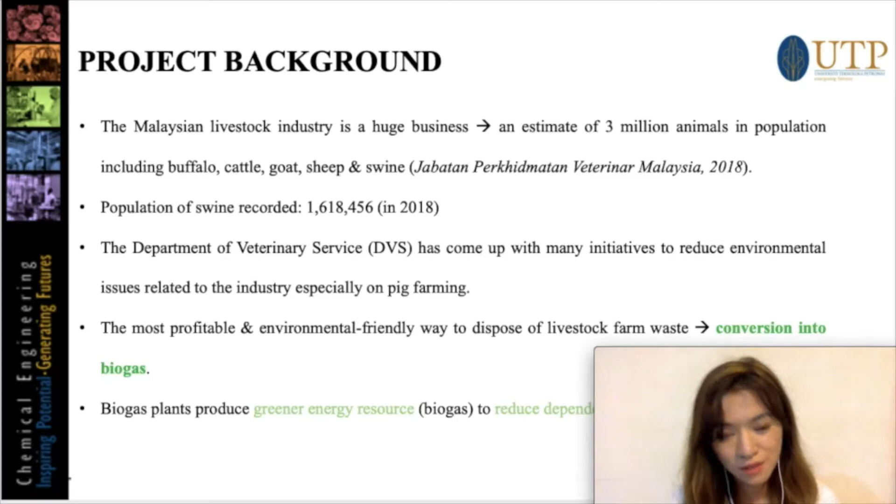Moving on to the problem statement, there are too many pigs farmed in Malaysia, and most swine farm waste is poorly managed, which can cause air and water pollution.

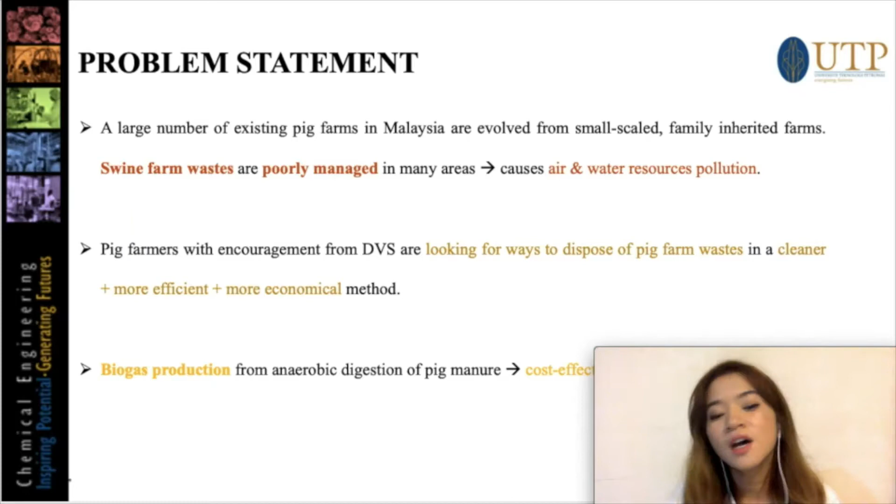DVS is finding ways to dispose of pig farm waste in a cleaner, efficient and economical method, in order to produce biogas from anaerobic digestion of pig manure to overcome these issues.

For the objective of the project, the main aim is to design a fully operational biogas production plant that converts pig manure into biogas and biofertilizer.

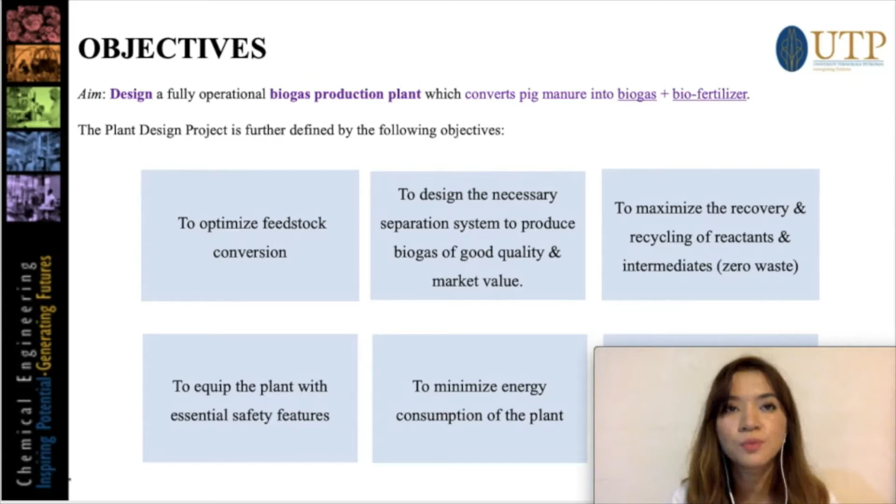There are 6 objectives that need to be achieved: to optimize feedstock conversion, to design the separation system, to achieve zero waste management, to equip essential safety features in the biogas plant, to minimize energy consumption, and to provide the most efficient plant with a high return on investment.

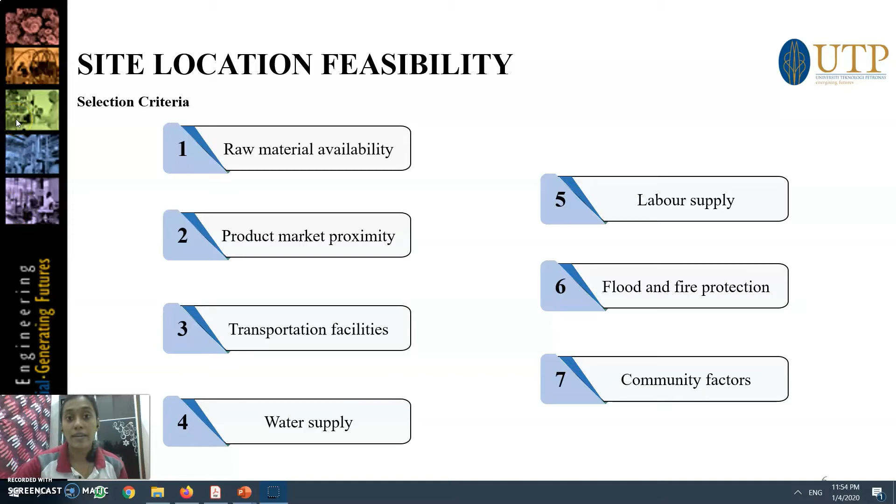We selected 3 locations throughout Peninsular Malaysia: Tanjung Sepat Selangor, Segari Lumut Perak, and Seberang Perai Selatan Penang. Out of these 3, we found that Tanjung Sepat Selangor was the most suitable, with the highest score in the scoring matrix.

This is because Tanjung Sepat holds the largest pig farming area in Malaysia, with approximately 250,000 pigs, and it is located in the center of Peninsular Malaysia in Selangor with better infrastructure for transportation, water supply, and flood protection.

The market is also close, with Klang Port being just 1 hour away, and the site is located over the Gas Malaysia supply grid. Hence, Tanjung Sepat Selangor was selected as the site location for our plant.

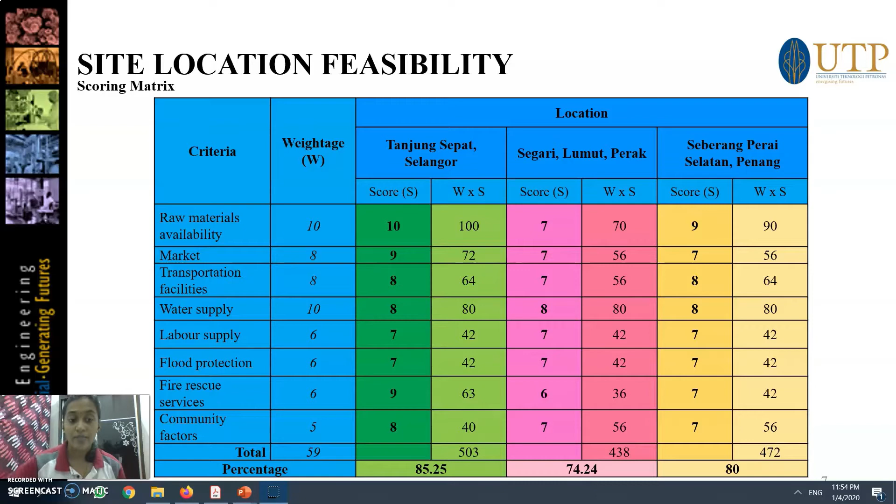As you can see, Selangor is very convenient with other facilities around it, located over the supply grid and surrounded by independent power stations which will make use of the biogas. Hence, Tanjung Sepat Selangor was selected as the best location for our plant site.

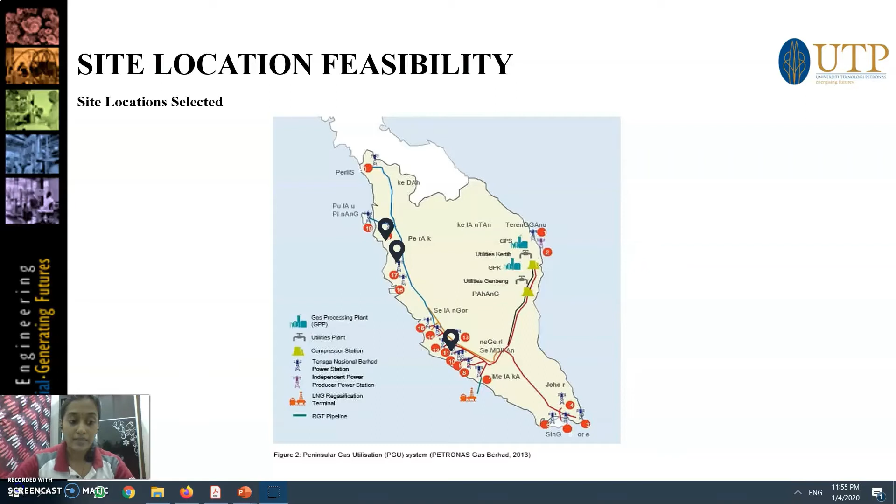My name is Gauzen Teo, and for the first part of my presentation, I will be presenting on the process screening under the chapter Conceptual Design Analysis.

This will be the first process route alternative, where we have 4 major equipment: 2 anaerobic digesters, 1 amine scrubber, and 1 liquid-solid separator.

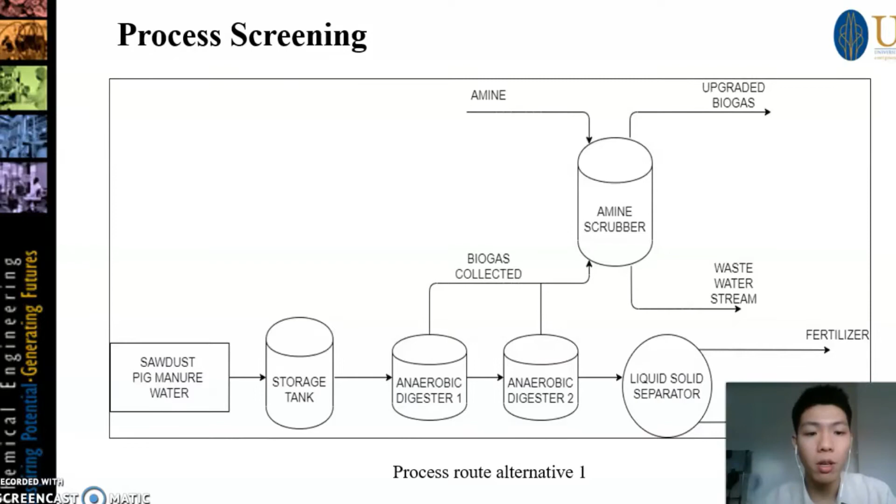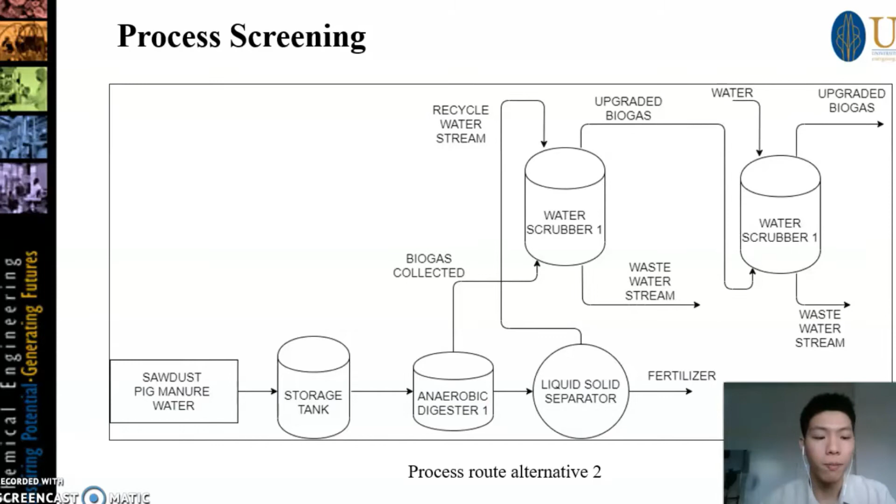For the second alternative, we have 2 water scrubbers, 1 anaerobic digester, and 1 liquid-solid separator. And for the last alternative, we have 5 major equipment: 2 anaerobic digesters, 2 water scrubbers, and 1 liquid-solid separator.

From our studies, we found that amine solvent used in the amine scrubber is more expensive compared to water scrubbers, and the regeneration of amine is complex, requiring more processes and equipment.

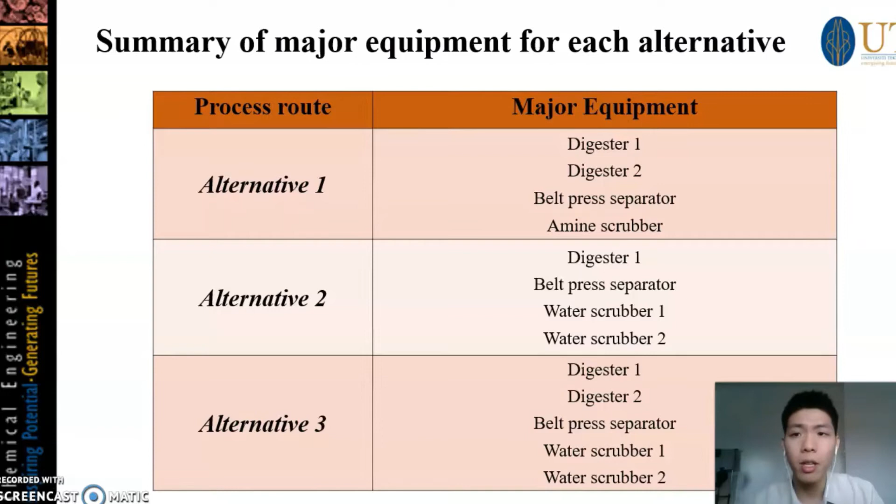Also, amine is more hazardous compared to water, and our group agreed not to waste too many resources on wastewater treatment, so we decided to eliminate the first alternative.

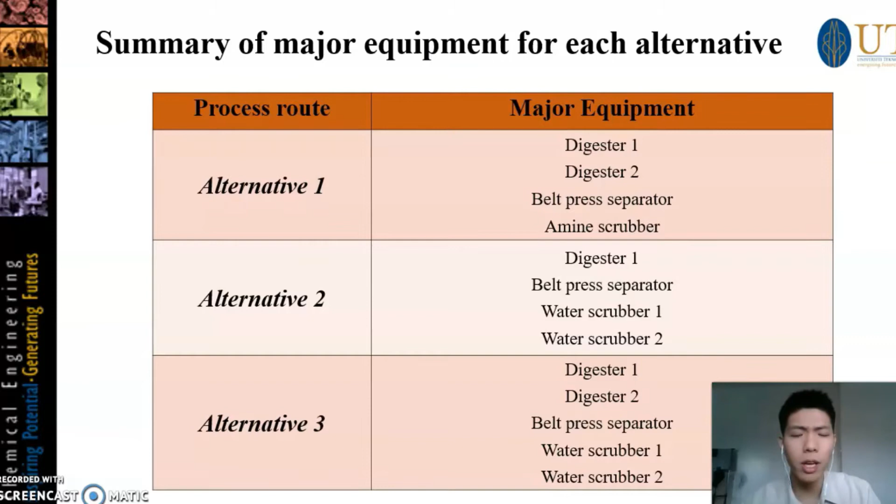Now, comparing the second and third alternatives, the difference is only in the number of digesters used. The third alternative uses 2 digesters, whereas the second alternative uses only 1.

From our literature review and studies, we found that multiple digesters provide more benefits in the production of biogas. Basically, there are 4 main chemical processes in biogas production: hydrolysis, acidogenesis, acetogenesis, and methanogenesis.

For the third alternative, we have 2 digesters. In the first digester, we can carry out the first 3 stages — hydrolysis, acidogenesis, and acetogenesis — with a lower hydraulic retention time.

The products from the first digester then go to the second digester, where the last stage, methanogenesis, takes place.

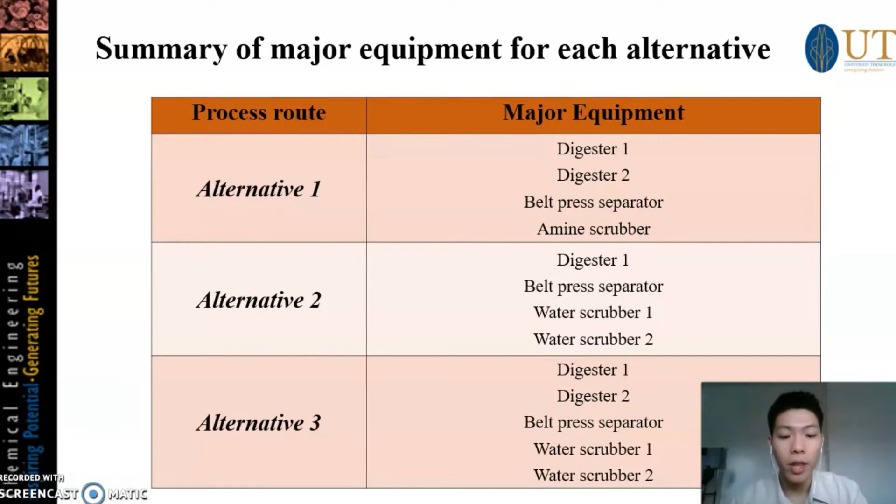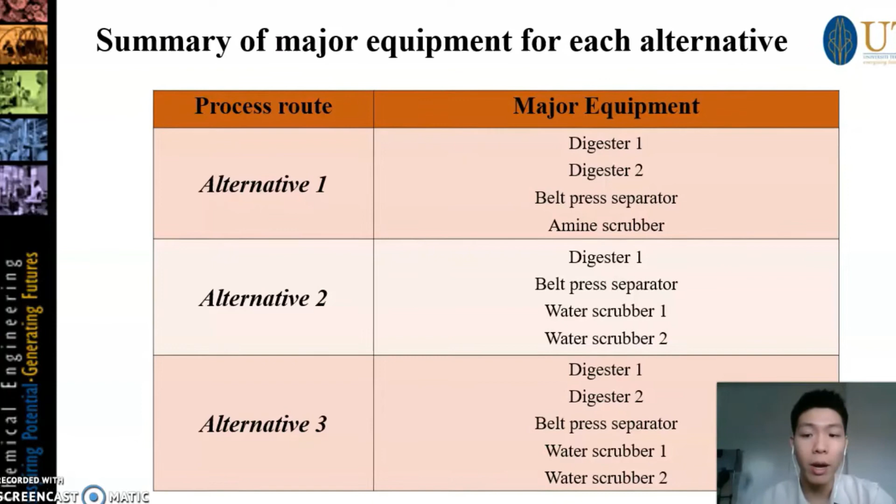We want a higher retention time for methanogenesis because that is the final stage where most of our biogas is produced, so by having a higher hydraulic retention time, we will also achieve a higher methane yield.

So let us start with the feed composition for inlet. For the inlet, we are using pig manure and sawdust. The table here shows the composition of pig manure and sawdust, and all the information we obtained through literature review as well as some information from online websites.

Initially the CN ratio for pig manure is quite low, just around 20 something. That's why we are doing the co-digestion with sawdust. We are doing wet digestion, which refers to 20% total solid percentage or lower than 20%. So in order to achieve the same CN ratio of 30 and also 20% total solid percentage, after some basic mathematical calculations...

The flow rates of sawdust, pig manure and water are listed in the table below: pig manure is around 1000 kg per hour, sawdust is 1500 kg per hour, and water will be around 6500 kg per hour. They're going to be our inlet.

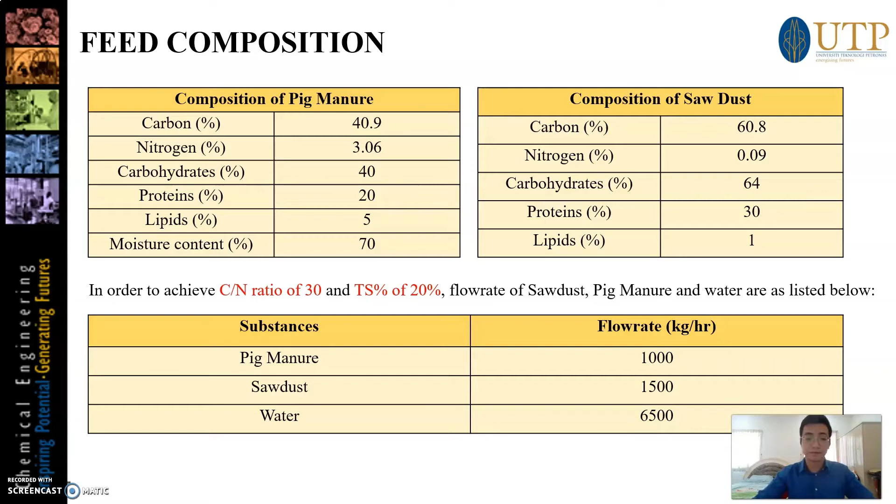The biogas produced depends on the amount of biomass in our inlet. The biomass refers to carbohydrates, proteins, and lipids. Eventually carbohydrates will be transformed into cellulose, proteins into soluble protein, and lipids into triolein. After some basic percentage calculation, the amount of cellulose entering is 1080 kg per hour, soluble protein will be 510 kg per hour, and triolein will be 30 kg per hour.

This can be summarized in the block diagram at the right hand side corner here: the total biomass of cellulose, soluble protein, and triolein going to enter the reaction system for the production of biogas.

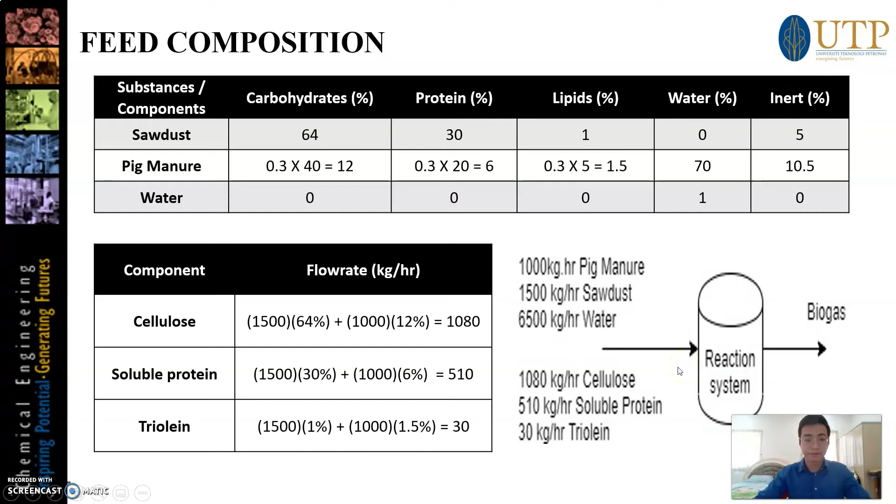The reason we're using a completely mixed digester is because this type comes with a mixer, which ensures proper agitation between our biomass and bacteria. It also comes with a heat exchanger, which ensures the temperature can always be maintained at the desired level. The CN ratio we set is 30.

Temperature will be in the mesophilic range, 35 to 45 degrees Celsius. Hydraulic retention time will be 30 days. And as we mentioned before, the number of stages will be 2 stages.

The first stage only includes reactions for hydrolysis, acidogenesis, and acetogenesis. The second stage is only for methanogenesis. The purpose of putting such a long retention time for methanogenesis is because we want to ensure all the biomass can fully react with the bacteria, in order to achieve a higher composition of methane in the biogas, since the methanogenesis process produces a very high purity of methane.

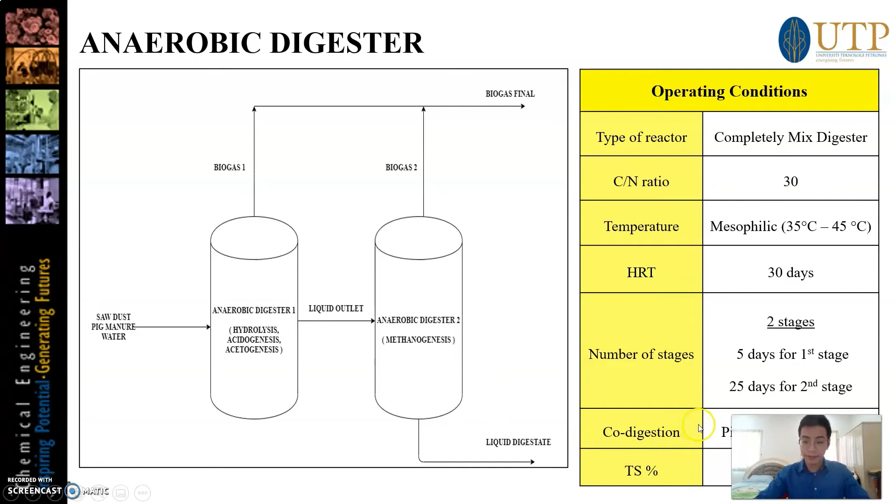The co-digestion we're doing is pig manure mixed with sawdust, as discussed before, and the total solid percentage will be 20%.

This is the overall reaction for anaerobic digestion. All of this we obtained from the ADM1 book and also from online literature review. There are a total of 9 reactions. All these reactions will be set into Icon for the simulation process and also for performing the manual calculations.

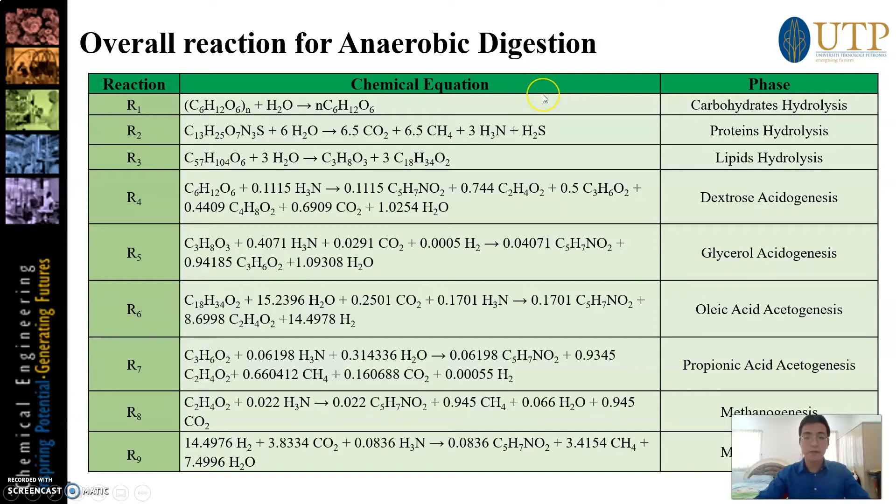Okay, this is the flow sheet that we performed for Icon.

Now I will continue with the mass balance for our reaction system. The assumption we made first is that the inlet equals sawdust plus pig manure plus water entering digester 1, and the outlet refers to biogas 1 plus biogas 2 with the liquid digestate. The total Icon simulation for the inlet is 9000, and for the outlet is 9000.01, showing a 0.0001% error.

For manual calculation, the inlet is also 9000, and the outlet is 8936.65, showing a difference of 0.704%. I will discuss why there's a difference between Icon and manual calculation later.

The right hand side table shows the total biogas collected from biogas stream 1 and biogas stream 2.

So as we can see, the total collected for icon is 1736.04 kg per hour. Manual is 1635.77 kg per hour.

Manual calculation shows there is 6.13% less than icon calculations. Let me show you an example why. For component water, manual shows 0 water coming out for biogas, because we assume there is 0 liquid going out from the gas stream, meaning there's only gas in the gas stream. However, in icon, they're showing water coming out at the biogas stream also. That's why this creates a difference between manual and icon simulations.

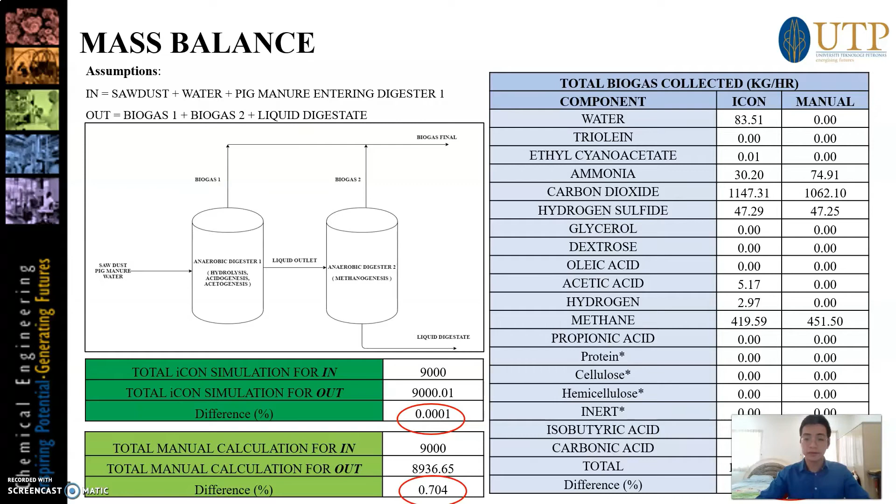Hi, my name is Ang Lizi, and I'm going to talk about the separation system at our biogas production plant. The separation process involves the use of 2 water scrubbers, also known as absorption columns, to remove major impurities such as carbon dioxide and hydrogen sulfide from the biogas coming out of the anaerobic digester. Water scrubbing is a physical absorption process, and thus no chemicals are required other than water.

Now I'm going to talk about water scrubbing occurring in the first absorption column. Liquid digestate flowing from a belt press separator flows into the first water scrubber from the top, while raw biogas with a methane mass percentage of 24.2% flows into the scrubber from the bottom. The first water scrubber has a theoretical stage of 10 and operates at a pressure of 3000 kPa, or 30 bar. However, after undergoing water scrubbing, the methane mass percentage in biogas only increases to about 28.2%.

Therefore, a second water scrubber has to be utilized to further increase the biogas purity to over 95% methane. Fresh water is used as a medium to remove CO2 and H2S in the second scrubber. Prior to entering the absorption column from the top, fresh water is cooled to a temperature of 5 degrees Celsius. Biogas from the first scrubber enters the second scrubber from the bottom. Just like the first scrubber, the second scrubber has 10 theoretical stages and is operated at a pressure of 3000 kPa.

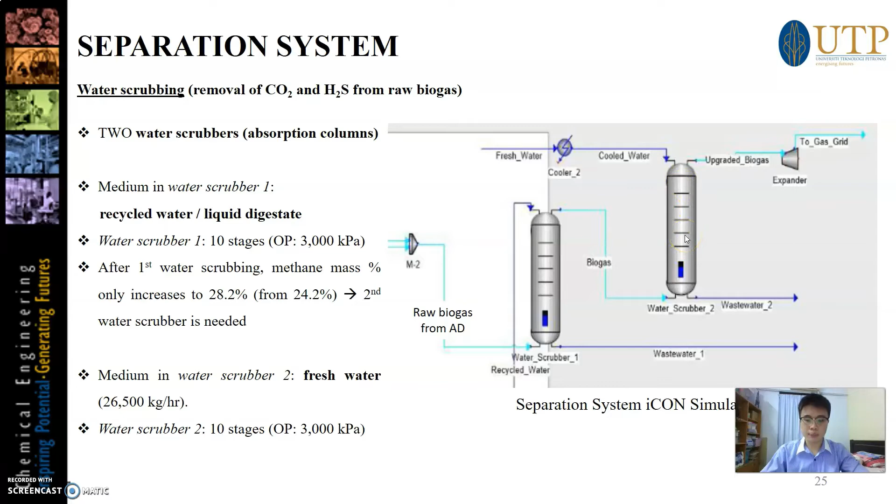After a second water scrubbing process, the final composition of upgraded biogas consists of 95.7% methane, 3.6% carbon dioxide, and trace amounts of water and hydrogen. No H2S is detected in the biogas coming out of the second scrubber, indicating that 100% H2S removal efficiency is achieved. On the other hand, mass percentage of CO2 decreases from 69.5% in the raw biogas to 3.6% in the upgraded biogas, indicating a CO2 removal efficiency of 94.8% after going through the water scrubbing process twice.

As a methane content of 95.7% is achieved in the final upgraded biogas, it is said to fulfill the standard natural gas quality and is qualified to be injected into the gas grid of Gas Malaysia.

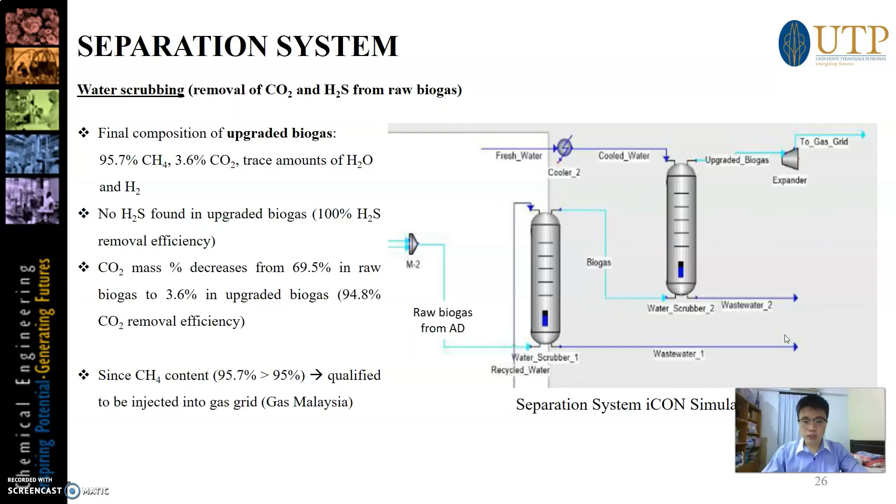As for the wastewater coming out of both absorption columns, they are sent to the wastewater treatment plant, operated by an external wastewater management company, to be treated before being discharged into a river.

In biogas upgrading, applying the technique of absorption, the underlying principle is that CO2 and H2S are more soluble than methane in water. Raw biogas meets water that flows counter-currently in an absorption column. Thus, loaded water leaving the column will contain increased carbon dioxide and hydrogen sulfide concentration, whereas upgraded biogas leaving the column will be enriched with methane.

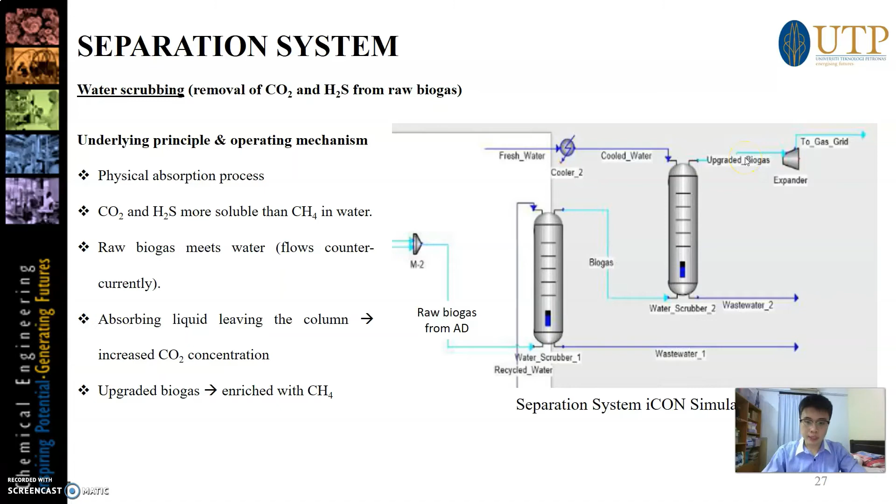In this plant design project, two common absorption techniques used for upgrading of biogas are proposed, namely water scrubbing and chemical scrubbing. To select a separation system out of these two, the advantages and disadvantages as well as estimated maintenance cost of each absorption system are studied and summarized in Table 1 and Table 2.

Based on Table 1, it can be summarized that both water scrubbing and chemical scrubbing are able to produce biogas of high purity or high methane content, and also low methane losses. However, water scrubbing is a slower process compared to chemical scrubbing, and it also requires a larger column volume due to the large amount of water needed to remove CO2 and H2S.

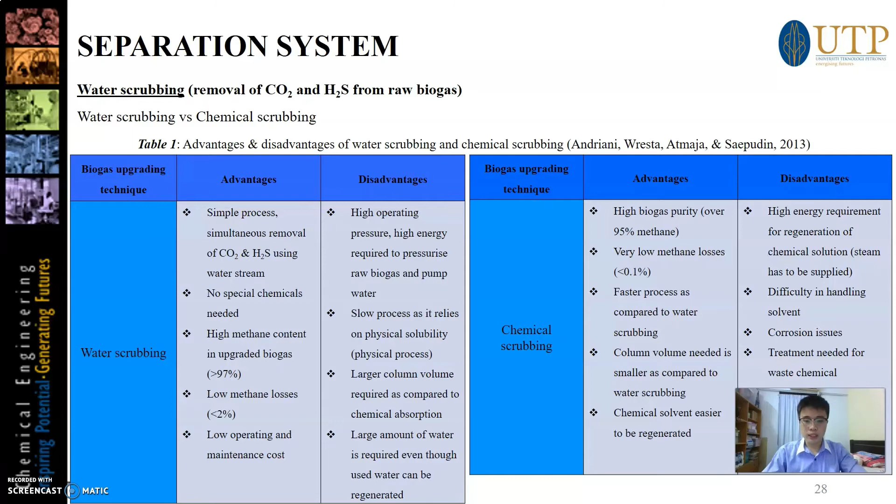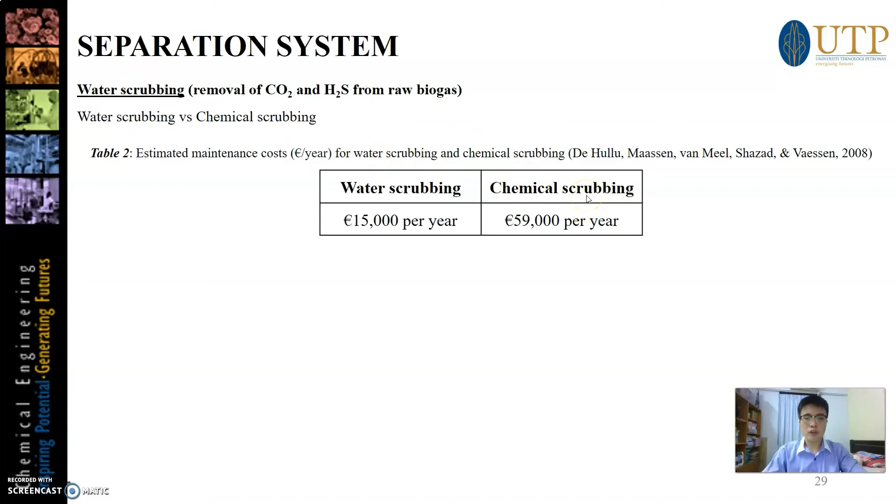Despite the drawbacks of water scrubbing, its advantages relative to chemical scrubbing are that it requires lower solvent regeneration energy, its wastewater stream needs no special treatment, and it is easier to handle water than chemical solvent. Most importantly, water scrubbing requires relatively lower operating and maintenance costs of 15,000 per year compared to chemical scrubbing at 59,000 euros per year, according to Table 2. Therefore, in our biogas plant, water scrubbing is selected over chemical scrubbing to purify raw biogas coming out of the anaerobic digester.

Next, I'm going to talk about the belt press separator, which is a type of liquid-solid separator used to separate digestate, a byproduct of biogas production, into liquid and solid digestate. In a belt press separator, water is separated from the raw digestate and then used as a medium to perform water scrubbing in the first column.

Replacing fresh water with liquid digestate can cut down on the usage of fresh water and subsequently save costs for the plant. The solid digestate, in which the amount of water has been reduced from 95% to 27%, can then be sold as a biofertilizer.

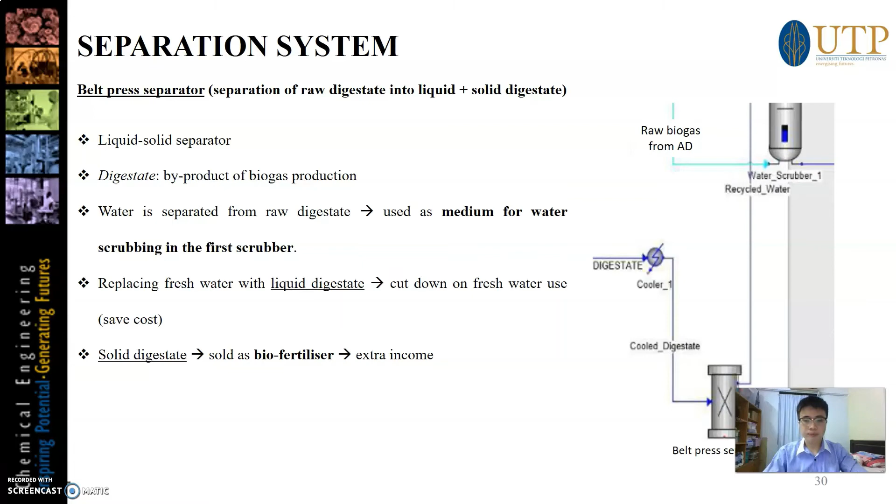This generates a little extra income for the biogas production plant. In our project, three types of liquid-solid separators are considered: centrifuge, screw press, and belt press separator.

The weight matrix method is used to evaluate the most suitable liquid-solid separator for the separation of digestate into liquid and solid digestate. The ranking system is established with a score of 1 for most undesirable or not recommended, and 5 for most desirable, best option.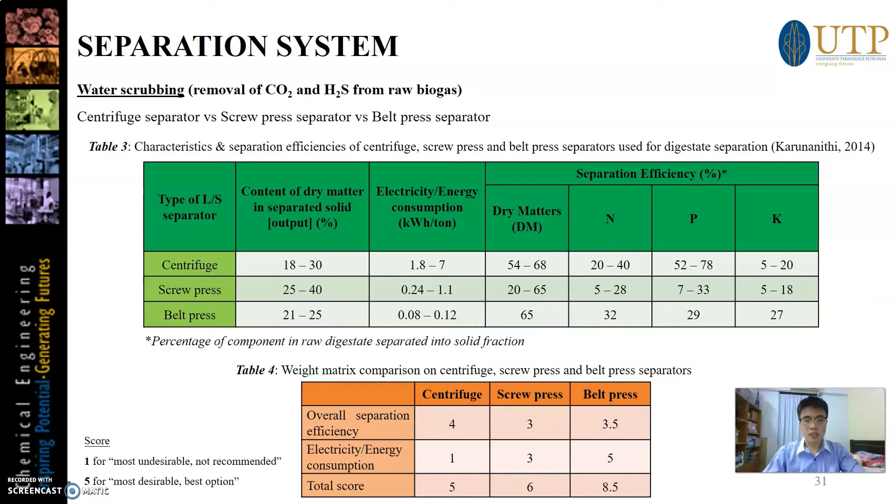Thank you. In economic potential, we must consider EP1 and EP2, which is economic potential 1 and economic potential 2.

For EP1, the formula is the product minus raw materials. The raw materials are sawdust, water, and manure. Each of the prices is stated in Table 13.

From the market analysis, we found that the price of sawdust is 0.035 ringgit per kg, and the price for water is 1 ringgit per kg, and for manure, we assume it is free from the farm.

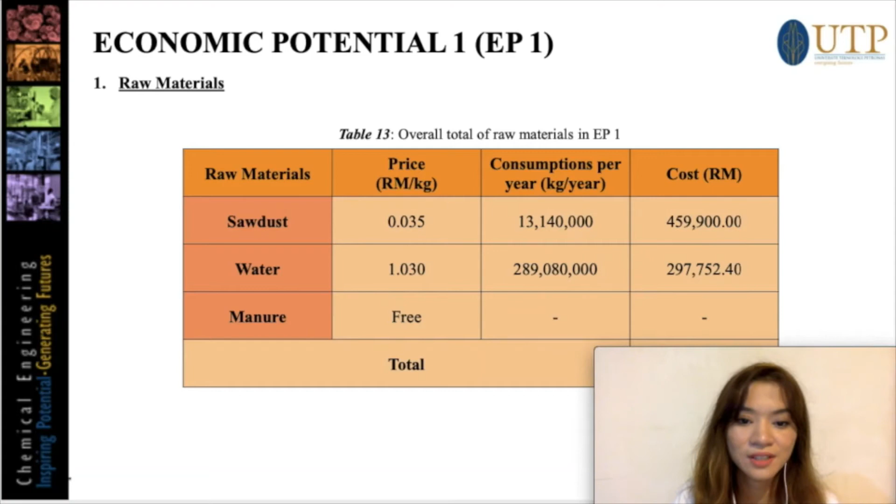For the consumption per year, we assume there are 365 days per year, and multiply with the price of each raw material to get the value of the cost. From the table, the total cost of raw materials is 700,000.

As for products, the products are biogas and fertilizer. Each of the prices is stated in Table 14. From the market analysis, we found that the price of biogas is 15.91 ringgit per kg, and the price for fertilizer is 2 ringgit per kg.

So the revenue for biogas is in the range of 58 million, and for fertilizer, the revenue is 8 million, which makes the total revenue of the products 67 million in total.

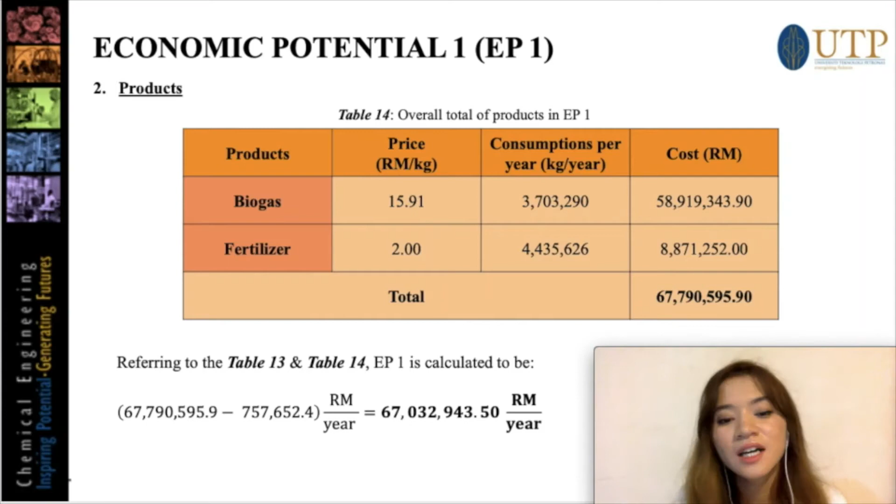So to find the profit, the total revenue of the products minus the total cost of raw materials gives the profit, which is 67,032,943 ringgit for the biogas production plant.

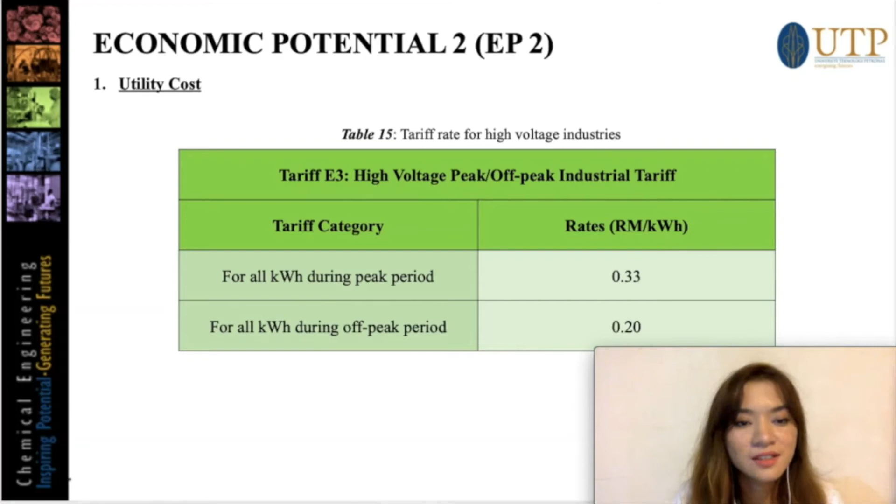For EP2, the formula is revenue minus cost of material minus utility. Table 15 shows the tariff rates for high voltage industry during peak and off-peak hour periods provided by TNB. The rate for peak hour is 33 cents and for off-peak is 20 cents.

Table 16 shows the cost before heat integration. We have 2 coolers and 2 heaters. Before heat integration, the energy consumption for the coolers and heaters are 700 and 200, which makes the total energy use 900.

To get the total cost per hour, the energy of each utility is multiplied with the rate of peak period and off-peak period. To get the total cost for a day, the total cost per hour is multiplied with 8 hours for the peak period and 16 hours for the off-peak period. Then we sum up the total cost of both utilities in a day.

We got 5,687 ringgit per day. Next, the total cost of both utilities per day has to be multiplied with the year, which consists of 365 days, to get the cost per year.

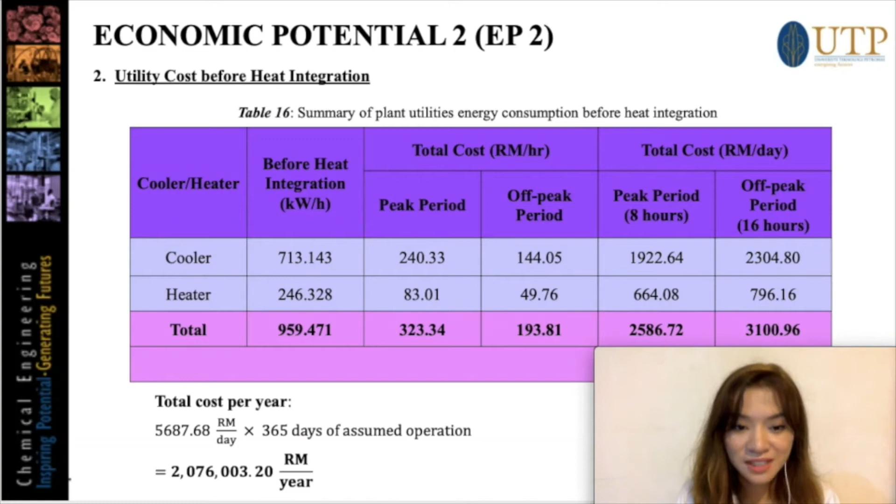The amount is 2,076,000 ringgit per year. Table 17 shows the utility cost after heat integration. We still have 2 coolers and 2 heaters. After heat integration, the energy consumption for cooler and heater are 600 and 200, which are lesser than before, making the total energy use 800.

To get the total cost per hour, the energy of each utility is multiplied with the rate of peak period and off-peak period. To get the total cost for a day, the total cost per hour is multiplied with 8 hours for the peak period and 16 hours for the off-peak period.

Then we sum up the total and we got 5,200 ringgit per day. The total cost of both utilities per day is multiplied with 365 to get the total cost per year, and the amount is 1,900,000 ringgit per year, which is 100,000 ringgit lesser.

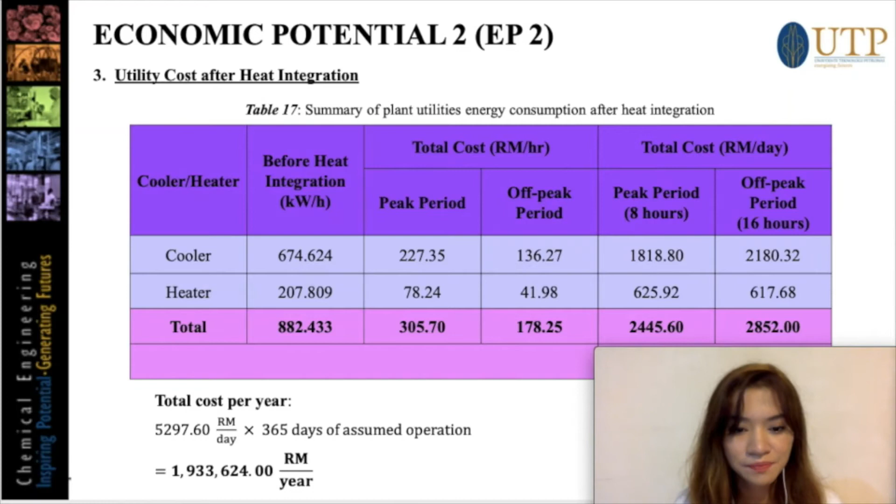Table 18 shows the summary of the whole economic potentials, which include EP1 and EP2. For EP2, EP1 is minus the amount of before heat and after heat integration. So that's all for the economic analysis.

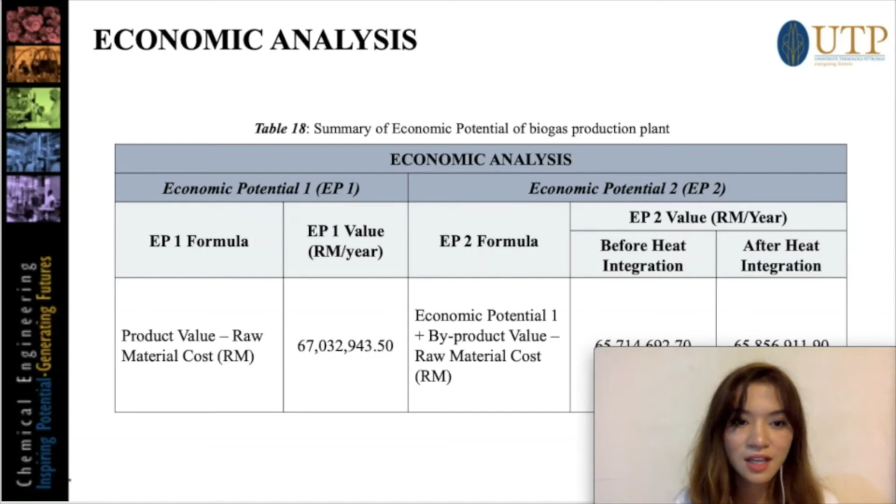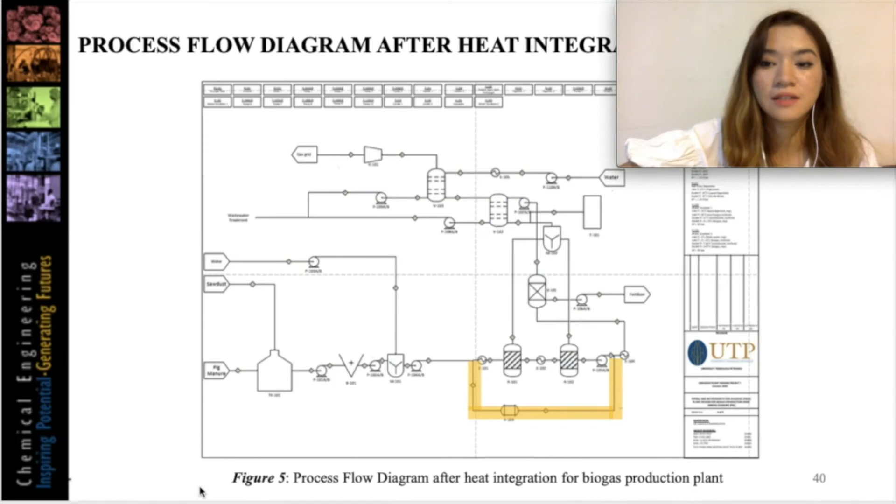For the heat integration part, the first step is identification of the hot and cold streams in the process. In this process we have 4 streams, 2 hot and 2 cold, mostly in the temperature range of 5 to 45 degrees Celsius. The heat load itself is extracted from the software so the CP can be calculated.

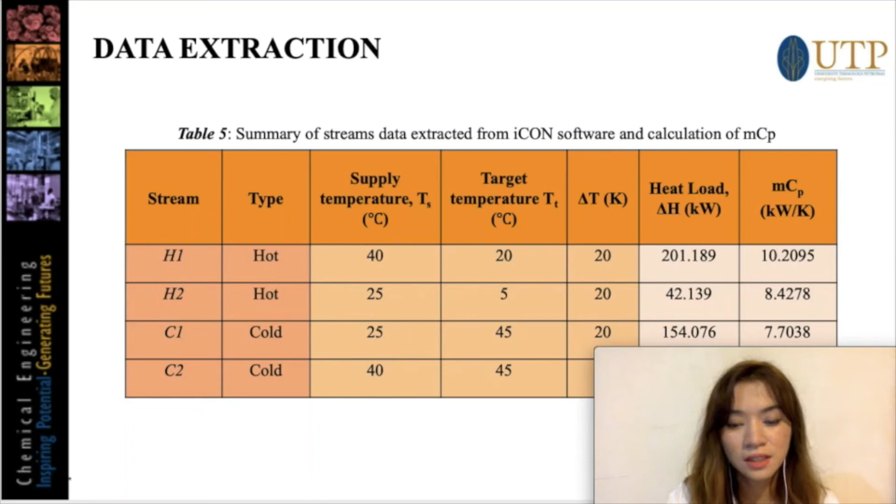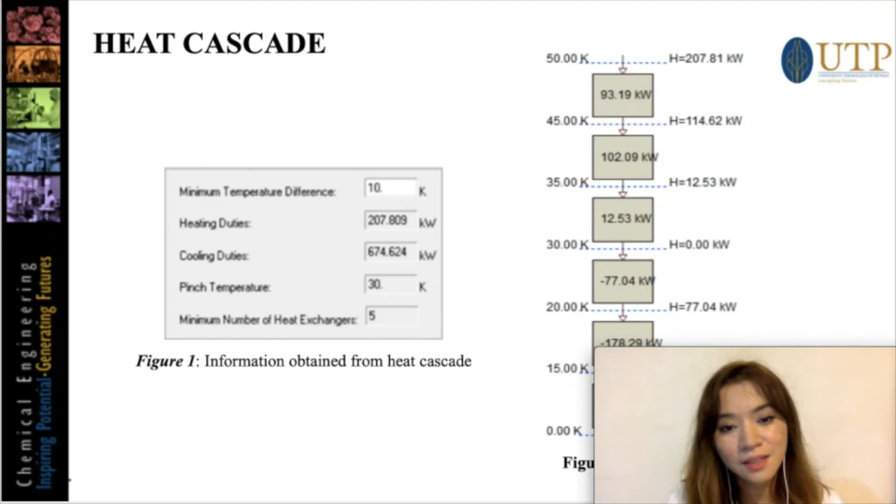In this chapter, we use HINT software to generate the heat exchanger network. From figure 1 we obtain information from the heat cascade. The minimum temperature difference is 10, because we found it suitable for biogas production. The heating and cooling duties are 200 and 674. From the cascade, the pinch temperature we obtain is 30.

Figure 3 shows the optimized heat exchanger network. As shown, 1 heat exchanger, 2 cold utilities and 2 hot utilities are added to the entire network for balancing. The first heat exchanger connects the first stream and the third stream, with a heat load of 38 kilowatts. The second stream is fully done by utility, with a heat load of 42 kilowatts.

For the third stream, below the pinch, it can only be inserted with cold utility C4, which is 115 kilowatts, because there is no cold stream to act on it. The same goes for the fourth stream, which can only be inserted with cold utility, with an amount of 559 kilowatts.

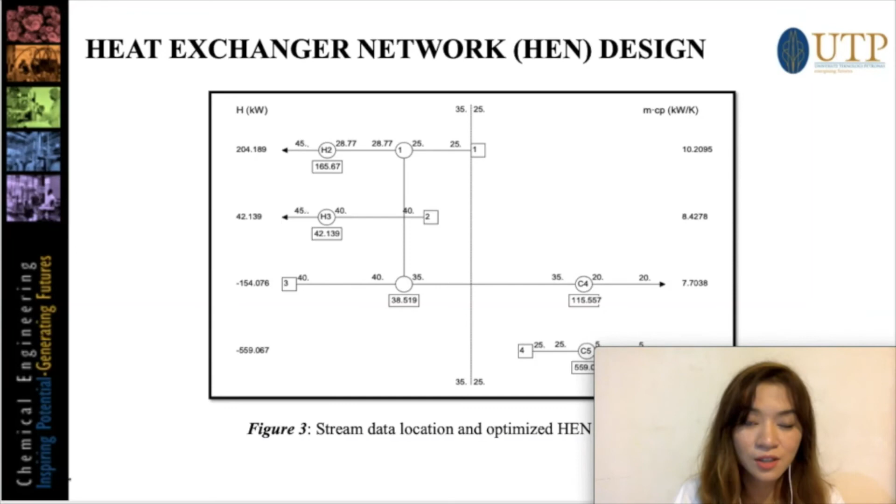As for CC and GCC, CC is the composite curve and GCC is the grand composite curve. Composite curves are constructed from the heat cascade diagram. The hot composite curve is known as the heat source, while the cold composite curve is known as the heat sink. Heat is recovered in the hot composite curve and transferred to the cold composite curve. The grand composite curve indicates the difference between the heat available from the hot streams of the process and the heat required by the cold streams of the process.

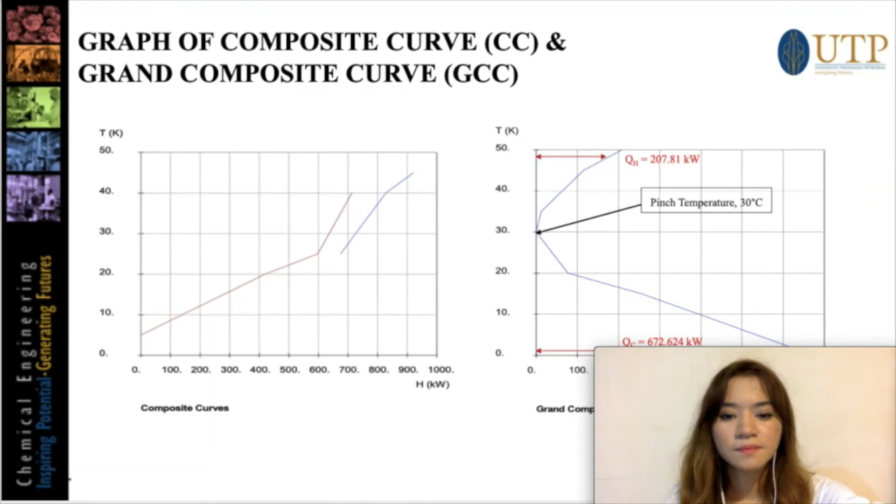Moving on to the comparison of utility consumption, this is the summary of utility requirements before and after heat integration. As you can see, the reduction percentage of hot utility is 5.4%, and for cold utility it is 15.6%.

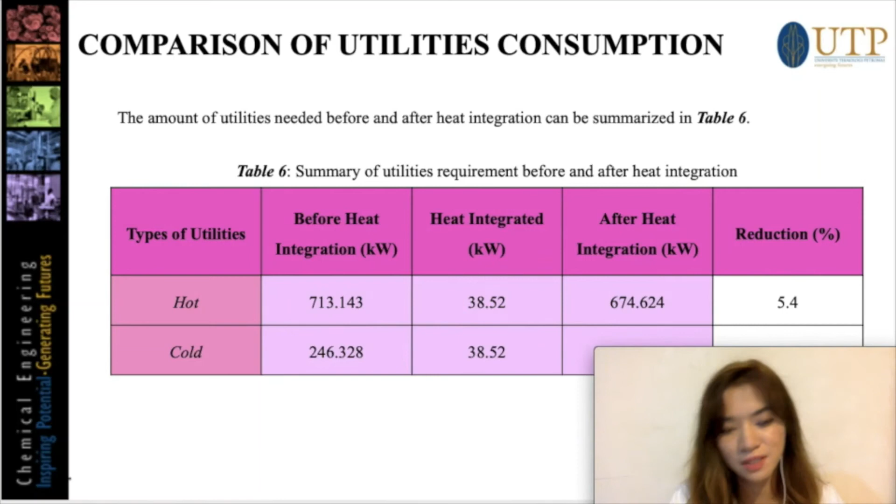For the second part of my presentation, I'll be presenting the piping and instrumentation diagram as well as the control strategies.

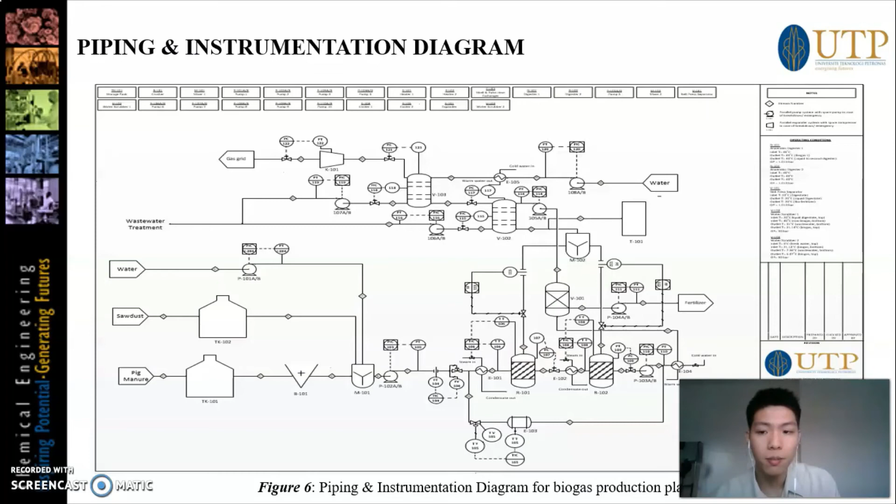This is the P&ID developed by our group for our biogas plant design. For the control strategies, we will first discuss the anaerobic digester and heat exchanger.

For our digester, we have 2 control objectives: to control the temperature of the reactor and to control the pressure of the reactor. We'll be using feedback type controls to manipulate the temperature of the inlet stream and also to manipulate the outlet flow rate of the digester.

For our heat exchanger, we want to control the temperature of the outlet stream. Similarly, we'll use a feedback type control to manipulate the flow rate of cooling water for the cooler, or to manipulate the flow rate of steam for the heater.

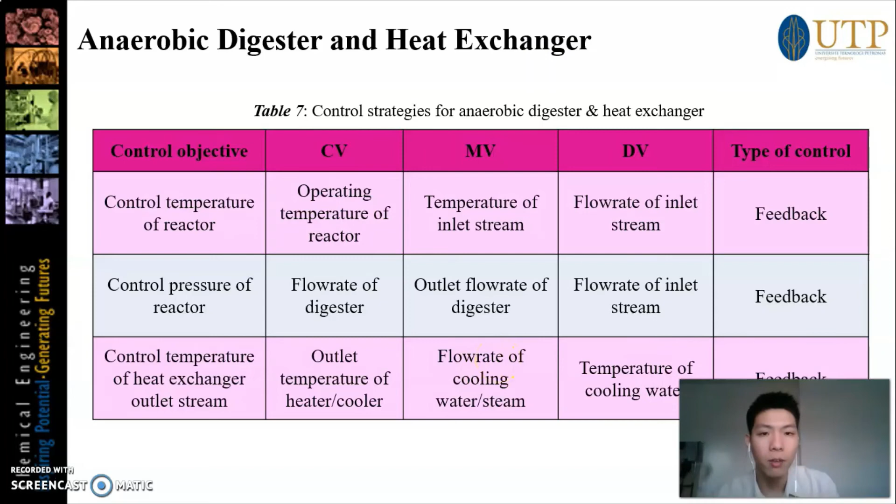As you can see here, we have a board-mounted temperature transmitter that sends an electrical signal to our temperature indicating controller. Over here we also have another temperature transmitter that sends an electrical signal to our controller, which then sends a signal to our control valve to control the inlet steam for our heat exchanger. Over here, we have our pressure transmitter and also our pressure controller to control the pressure of our reactor.

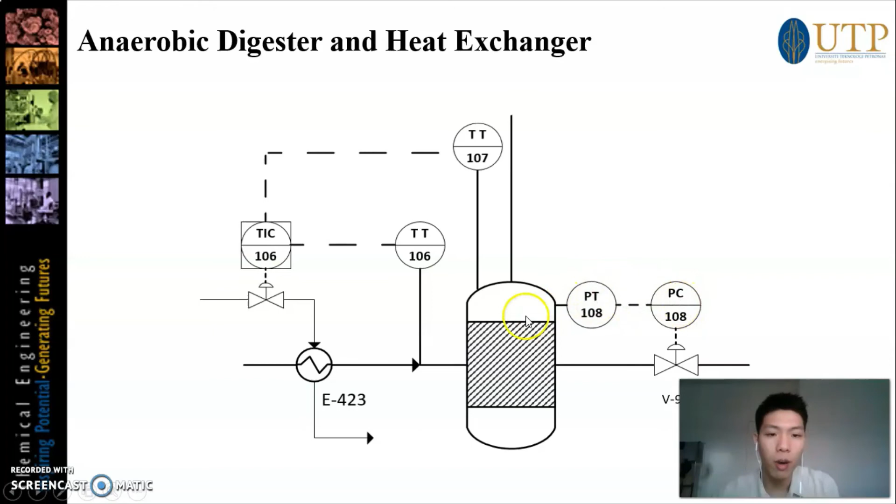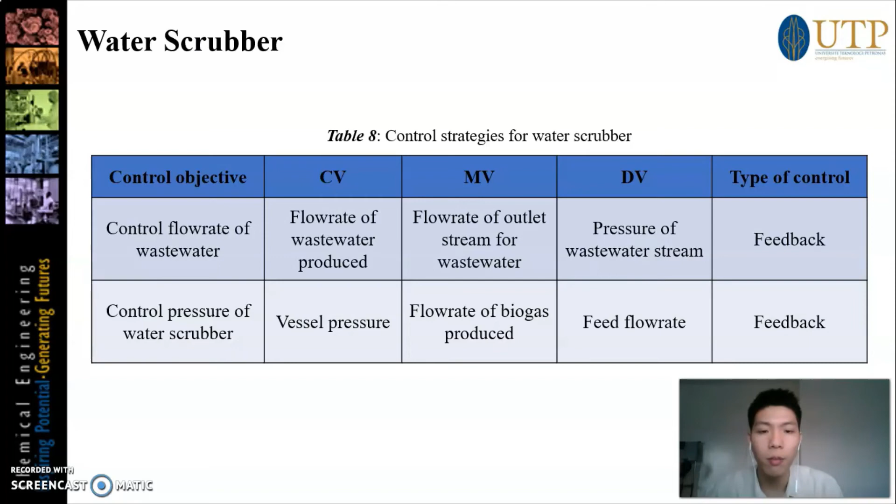Moving on to our water scrubber, where we also have 2 control objectives: first, to control the flow rate of wastewater, and second, to control the pressure of the water scrubber. Similarly, we'll use feedback type controls for these 2 objectives. We want to manipulate the flow rate of the outlet stream for wastewater for the first objective, and for the second one, to manipulate the flow rate of biogas produced.

As you can see here, on top we have our pressure transmitter and also our pressure controller to manipulate the outlet stream from our water scrubber. For the wastewater stream, we want to manipulate the flow rate, so we have our flow rate transmitter and also a flow rate indicating controller.

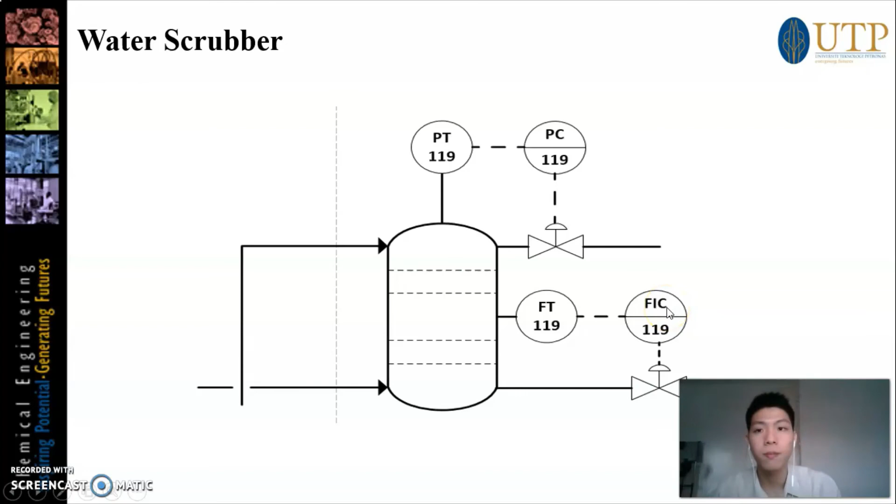Next is our belt press separator, where our control objective is to control the flow rate of liquid digestate produced. Similarly, we'll be using a feedback type of control to manipulate the flow rate of liquid digestate.

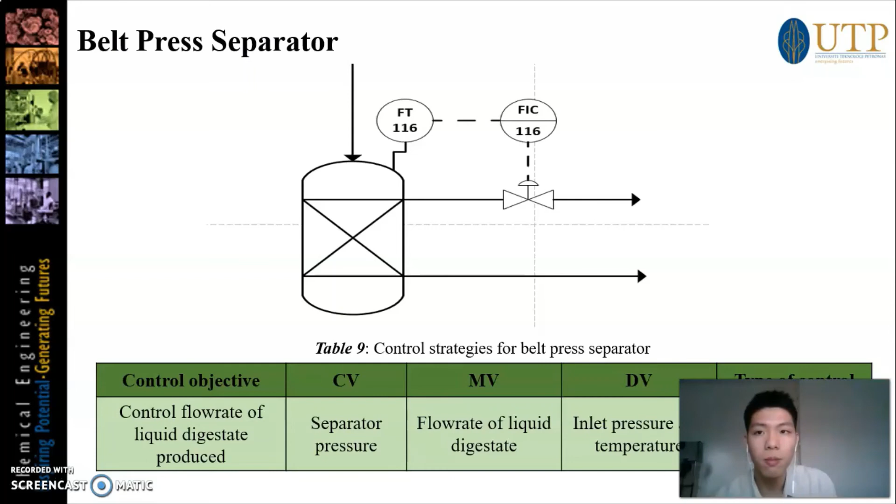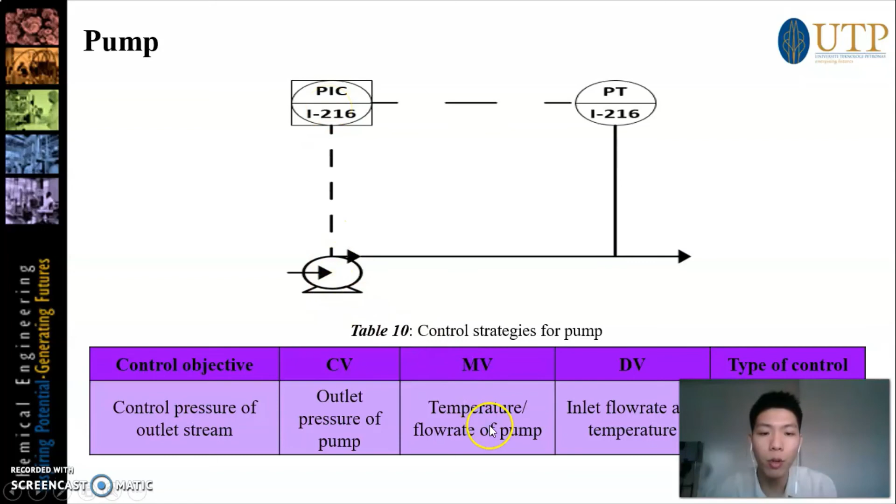Then for our pump, we will want to control the pressure of the outlet stream. Over here we have a pressure transmitter, which measures the pressure of the outlet stream, and then sends an electrical signal to our pressure indicating controller, which in turn sends an electrical signal to our pump so that we can manipulate the temperature or the flow rate of the pump.

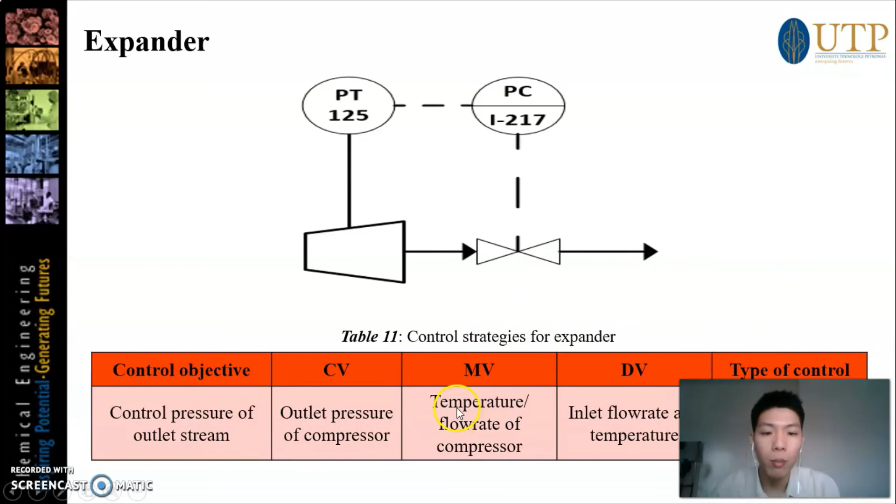For the expander, it is almost similar to our pump, where we want to control the pressure of our outlet stream from the expander. So we'll be using a feedback type of control to manipulate the temperature or the flow rate of our compressor.

That's all from me. Thank you.

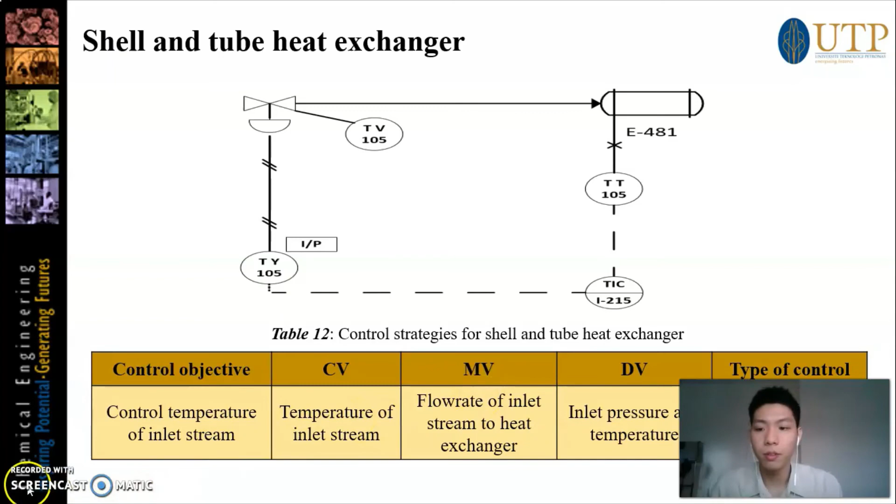Now, moving on to the HAZOP, or Hazard and Operability Studies, which is used to examine the system and anticipate risks associated with it. From our P&ID, we have identified 7 key nodes: Node 1, Digester 1; Node 2, Digester 2; Node 3, Mixer 1; Node 4, Mixer 2; Node 5, Water Scrubber 1; Node 6, Water Scrubber 2; and Node 7, Solid and Liquid Separator.

Once we identified these nodes, we looked for parameters that might deviate at each node, and the possible causes, consequences, and actions required to overcome these deviations.

Looking at Digester 1, or Node 1, the possible deviations might be temperature, pressure, flow, or pH, and the possible causes are related to malfunctions of components, pipe blockage, or leakage. The consequences are mostly related to inhibition of bacterial activity in the digester, and the actions we could probably take are properly maintaining the malfunctioning component whenever necessary, or installing control systems to ensure proper control over the digester.

Next, moving on to Digester 2, which is similar to Digester 1, it might also experience deviation in temperature, pressure, flow, and pH. The possible causes are also malfunctioning components, pipe leakage, pipe blockage, or improper flow of feed from Digester 1. The consequences are mostly interrupted digestion rate and disrupted product quality. The actions we could probably take are proper maintenance of the malfunctioning component or installation of alarm systems or control systems to monitor and control the flow of the digester.

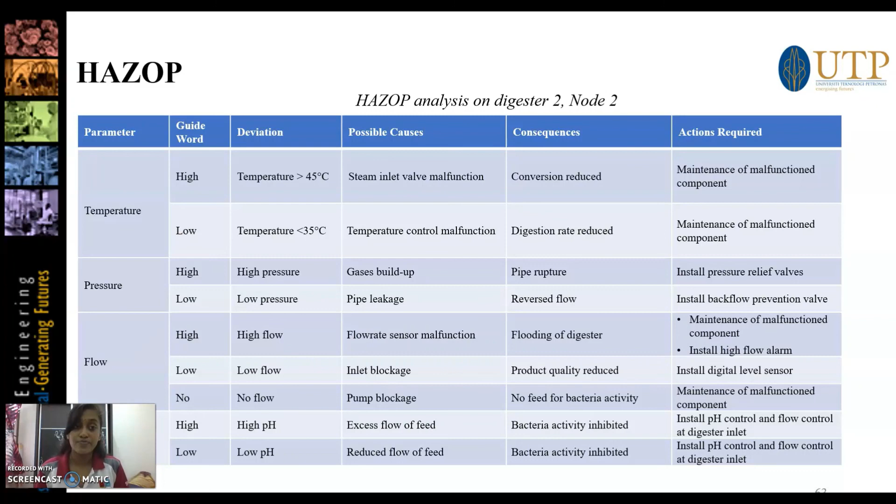Moving on to Node 3, Mixer 1, the possible deviations we identified are pressure and flow, which could possibly be caused by pipe blockage, pipe leakage, or malfunctioning sensors. The consequences are mostly related to the concentration of the feedstock or pressure buildup in the mixer that might lead to rupture of the pipe or the vessel itself. The actions we could probably take are frequent maintenance of the malfunctioning component or installation of proper prevention systems.

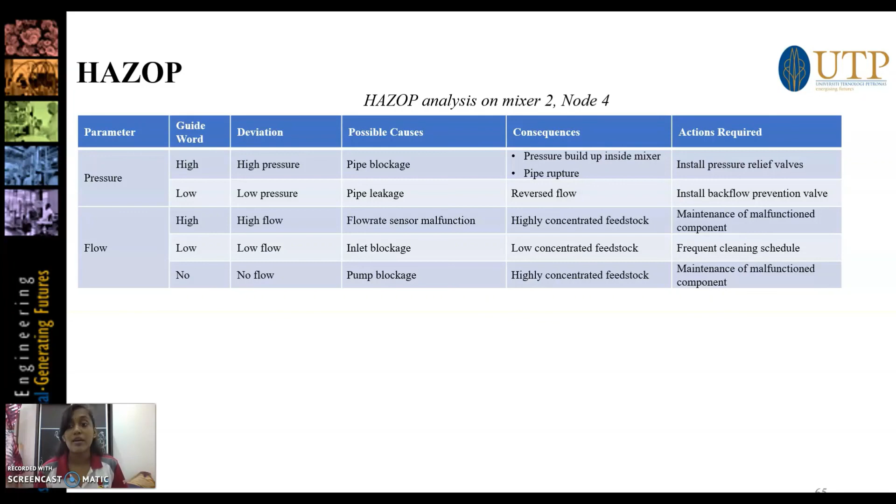Next, Mixer 2 is also similar to Mixer 1, which might also face deviations in pressure and flow due to similar causes: pipe blockage, pipe leakage, and malfunctioning components, which could be prevented by proper maintenance from time to time.

Next, Water Scrubber, or Node 5. The water scrubber might face deviations in surrounding temperature, pressure, or flow. The surrounding temperature deviation is mostly caused by hot or cold weather and could result in low purity or loss of methane in the liquid stream. The actions we could probably take are to control the water flow rate wherever relevant.

There might also be deviations in pressure and flow due to malfunctioning system components or improper loading rate, which could be prevented by installing pressure sensors and control systems, or maintaining the malfunctioning component from time to time.

Water Scrubber 2 is also similar to Water Scrubber 1, and might face deviations in surrounding temperature, pressure, and flow, possibly due to different loading rates, malfunctioning components, or inlet blockages. It might lead to flooding of material or impure biogas being produced. The actions we could possibly take are installing pressure sensors and control systems, or maintaining the components from time to time.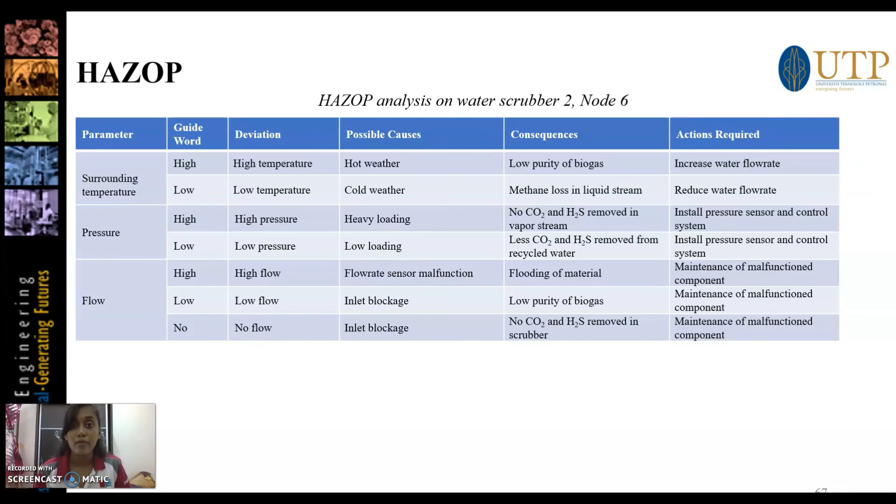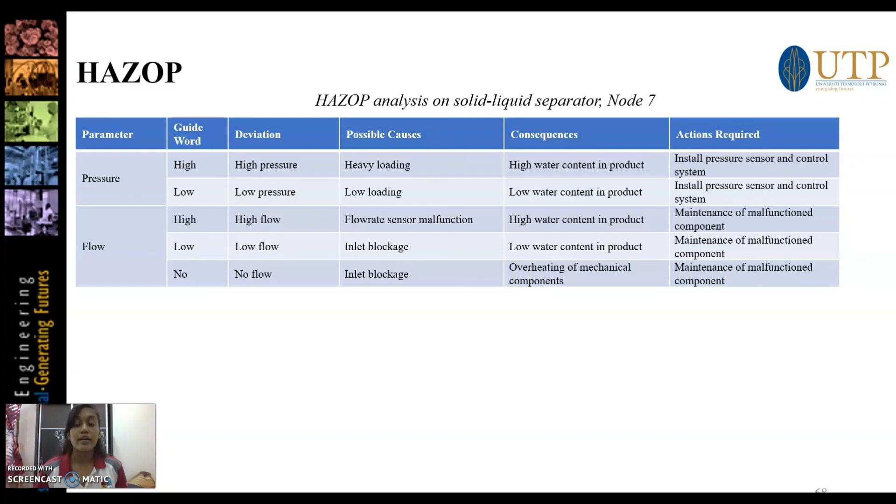Finally, Node 7, represented by the Solid and Liquid Separator, might face deviations in terms of pressure and flow, possibly due to improper loading rate, malfunctioning systems, or blockages in the inlet. The consequence is undesired water content in the product, whether high or low, and this could be prevented by installing proper sensors and control systems, or maintaining the components frequently. Thank you.